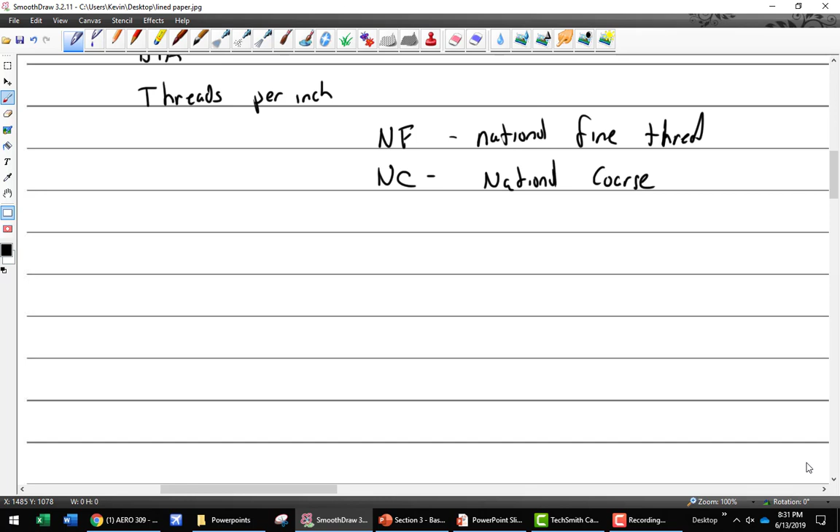All right, so let's talk about safety wire. Everybody's favorite project. Not for reals. It will frustrate you, and you will bleed and get mad at me, and I'm going to tell you, I didn't invent safety wire. All right, so safety wire. Safety wire or lock wire or however you want to call it.

So sizes. Safety wire comes in various different sizes and materials. So sizes. I don't like the way my notes... All right, we'll just do it this way. So stainless steel. That is the most common everyday go-to safety wire. There's other stuff. We'll talk about that. We're going to be talking about stainless steel safety wire.

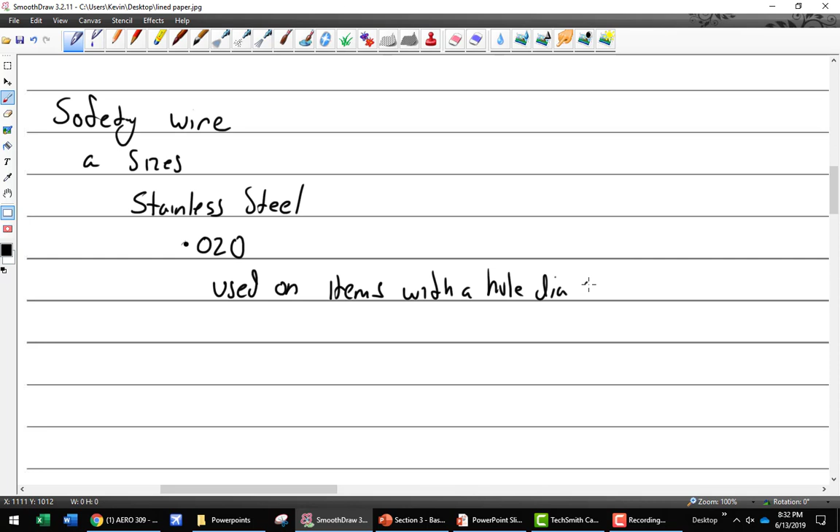There is .020 size safety wire, and oh boy, if you read 43.13, it kind of gives you this crazy definition. Used on items with a hole diameter, so that's like the hole in the head or a hole in the shank, of .045 to .062 with spacing less than 2 inches apart. So that's pretty close, right? I'm just going to give you kind of a rule of thumb.

And that is small screws. What does it say before .045? Of hole diameter of. Rule of thumb, small screws. So pretty much .020 is just really small screws. You don't use it a whole lot in aviation.

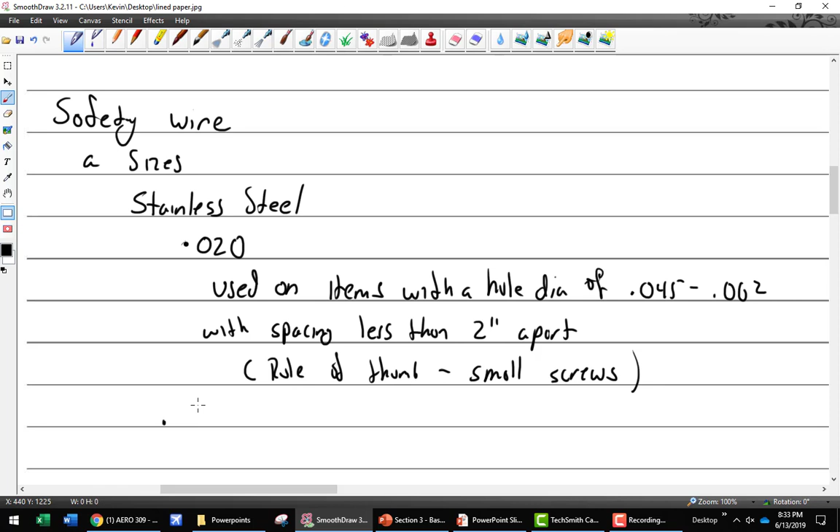Then you got your .032. And according to 43.13, it is used on items with a hole diameter, I'll abbreviate, hole diameter larger than .045. All right, so check this out.

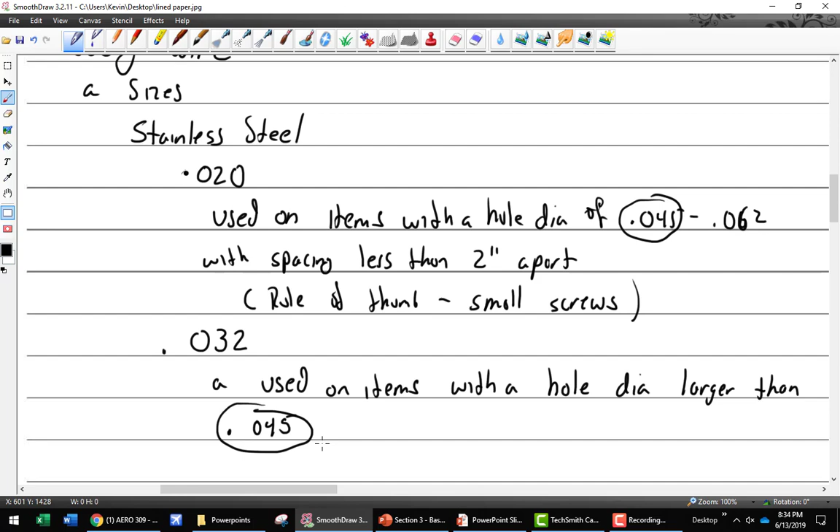This is used on stuff with a hole diameter of .045 to .062 with spacing less than 2 inches apart. This is used on items with a hole diameter larger than .045. That's the same number, and that's not a misprint. That's the same number as this number. So which one do you use? Most common. Rule of thumb, just go to .032. It's pretty much the stuff you use.

Now, could you get in trouble for using .032 where you were supposed to use .020? Never. You never get into trouble if you use a heavier safety wire. You get in trouble if you use a lighter safety wire. So if you use .032, you're fine. The only time I use .020 is if I've got little tiny screws that are very close together. You can't get .032 in and work it and do the twists, so then you go to .020. Otherwise, you're pretty much going to use .032 on just about everything. Okay.

Except, now we got .040 / .041. They seem kind of synonymous. I mean, you're talking about a 1/1000th of an inch difference. .041's a little stiffer to use. This is typically, unless otherwise mentioned, used on props.

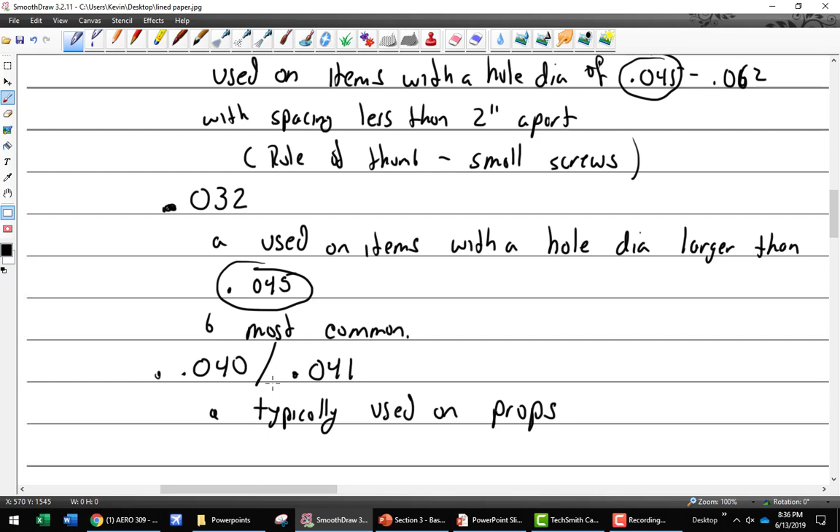One manufacturer tells you to use .040 and another manufacturer tells you to use .041. How can you solve that dilemma? Keep .041 in your toolbox and then never ever worry about it. Because you think the other manufacturer is going to get angry with you? They won't. Okay, so when you're just doing your general everyday safety wire, what's your go-to size? .032. If you're going to safety wire the bolts on a propeller, you better be using .041. You got little tiny screws? .020. All right, and what material?

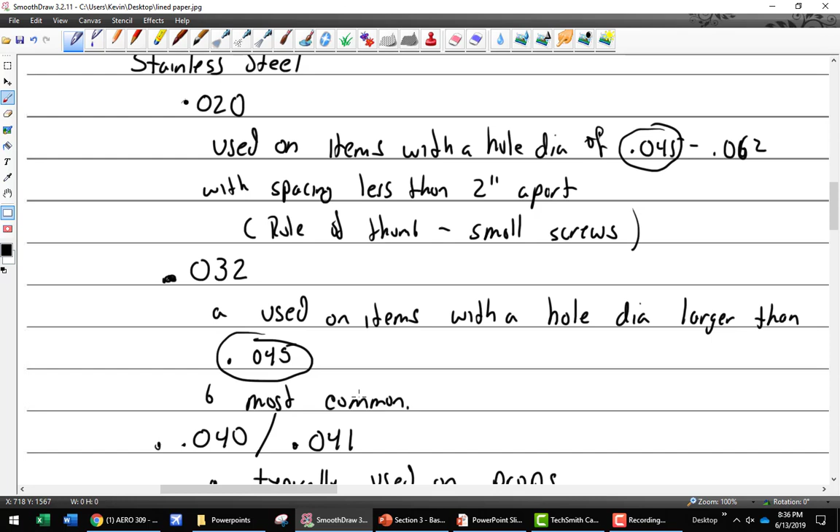All right. In addition to stainless steel, there is what? Is that a dot or an A? A. Okay. I was trying to be all with the outlining. But I'm picking and choosing what I want to do.

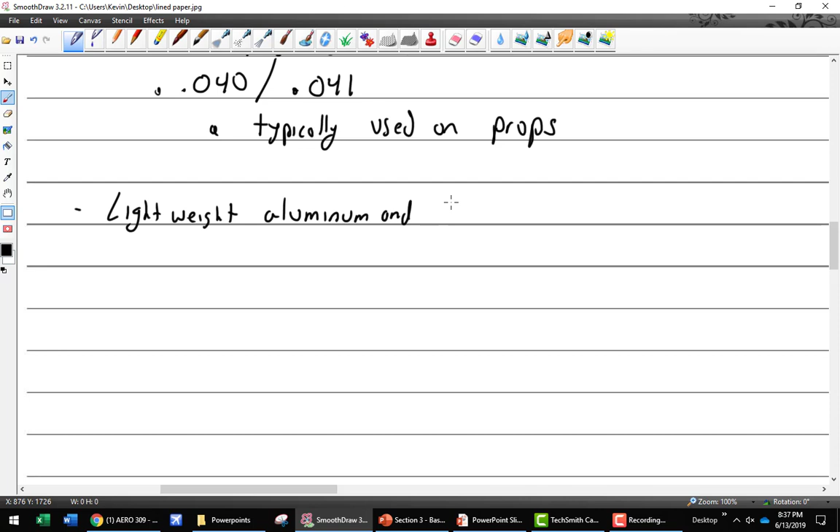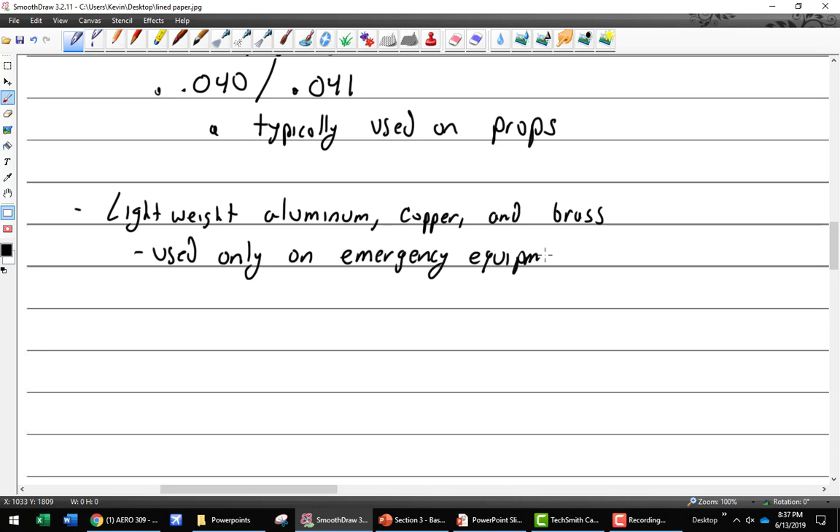All right, so lightweight aluminum, copper, and brass. Those are 3 different types that you can also get. It is used only on emergency equipment where the wire must be broken by hand. An example of emergency equipment?

Emergency equipment. Do you think that I should wire this pin onto this fire extinguisher with 040? Only if you want to throw it at the fire. Yes. Unless you want to beat the fire out this way. So, any type of emergency equipment. Switches that may be guarding something, like fire bottles.

On an aircraft, you actually have remote operated fire bottles. You have to lift up a switch and push a button or pull a handle. That handle or that button or lever may be safety wired with some very lightweight wire. It's really mostly there just to kind of say, are you really sure you want to touch this? And if the answer is yes, you want to be able to get access to it right away.

And then secondly, it lets us as the mechanic know, hey, maybe somebody's used this. If I came over to this and it didn't have this red strap on here, I could think that maybe this has been used. And then how would I check it? Look at the gauge. All right, so, emergency slide or something of that nature. You don't want to be looking for a pair of wire cutters during an emergency.

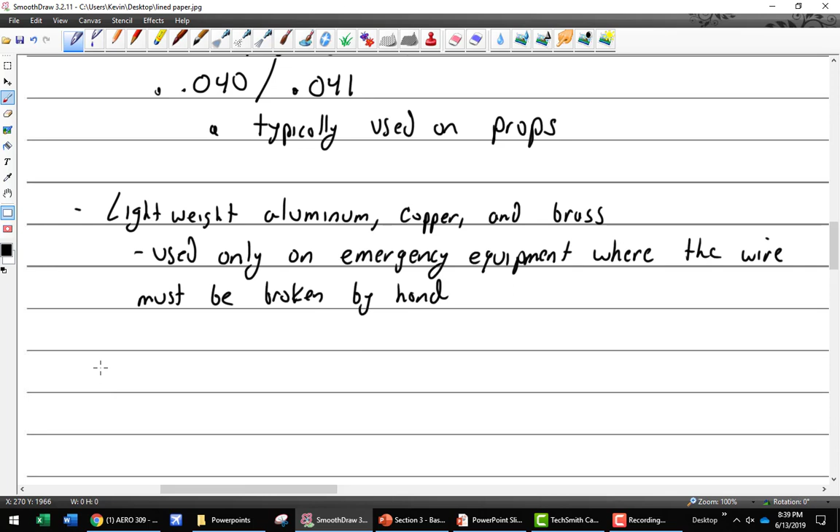All right, how to safety wire. How to safety wire is really something that needs to be shown more than it is talked about. I cannot show you because I don't have a way to mount something here and do it. So I will show you as many times as you want me to out in the lab. I've already given a couple of demos today, so I will do it. But there's a couple of rules that you should be aware of.

So safety wire is twisted. That's the end of the sentence. It is twisted at a rate of 6 to 8 twists per inch. If you go too much, it can break. Sometimes you use a single strand, but that's only if you're using lightweight screws and stuff. Loop the wire around the head, not over.

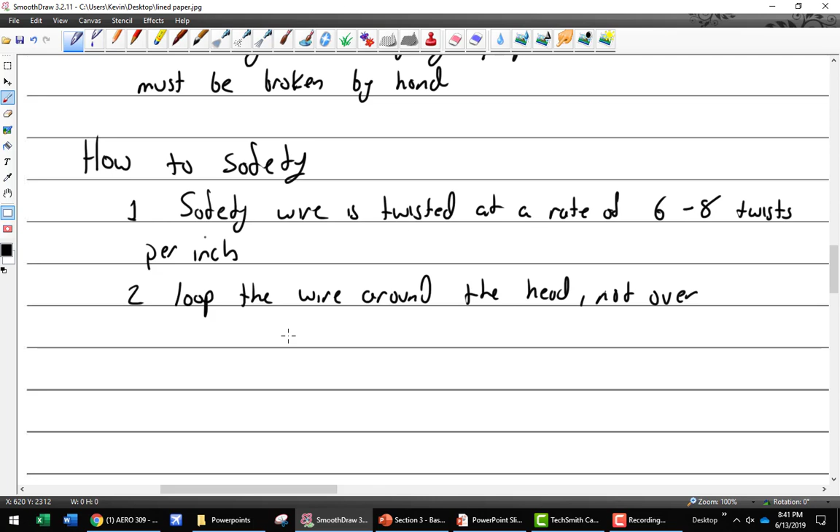The exception is castle nuts, castellated nuts. Castle, C-A-S-T-E-L. That does not look right. That's it. The exception is castle nuts. The wire goes over the top. What else can I say here? Oh. The wire, just like the cotter pin, should pull the bolt tight.

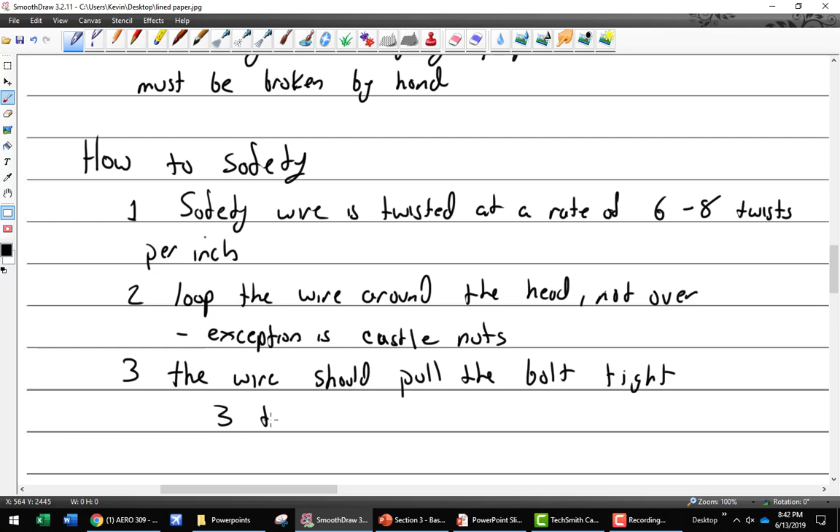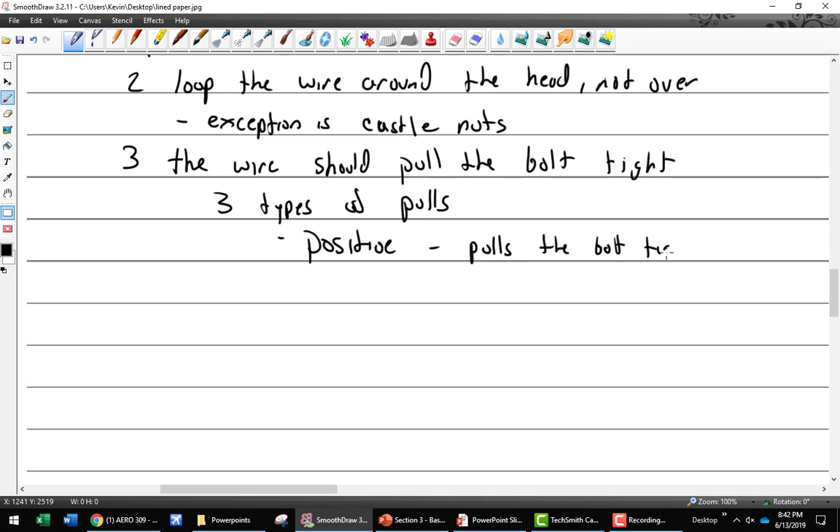So there's 3 types of pulls. Positive, which pulls the bolt tight. Neutral, we'll say no pull. And negative, pulls the bolt loose. That would be bad. So you want a positive. You can accept a neutral, but a negative may get you mocked.

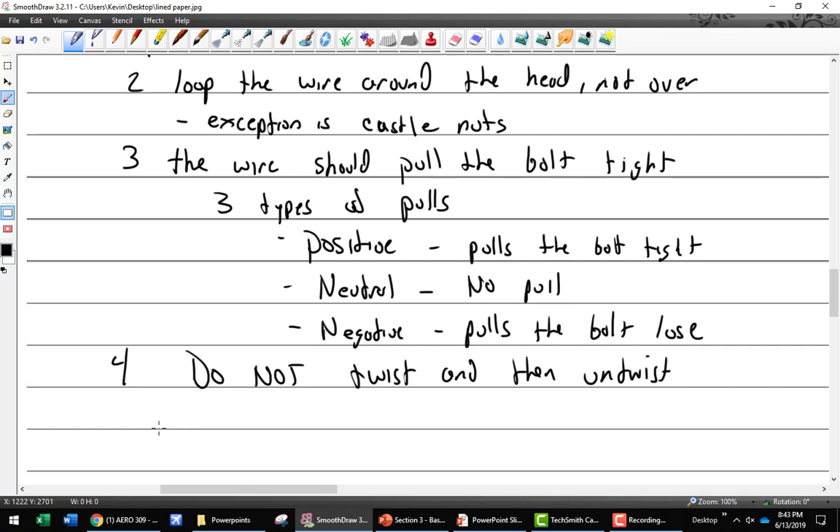That would never be an application, right? Never. Do not twist and then untwist. In other words, you twist it too far and you're like, oh, I got to untwist it. Don't do that. I can spot that a mile away, and you will too. So if you twist it too far, cut it off and try again. Do not adjust bolt torque to tighten wire. I know some people that do that. Do not reuse safety wire. Don't do that.

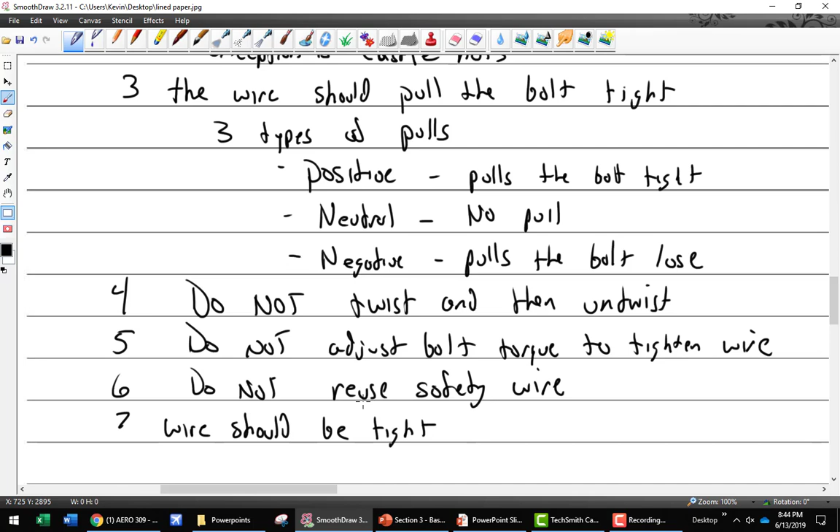All right, wire should be tight. So I can pluck it, make a little song on it. Should be nice and tight, not loose. Oh yeah. Cut the pigtail about 3/4 to 1 inch long. And hide the end so that I don't bleed.

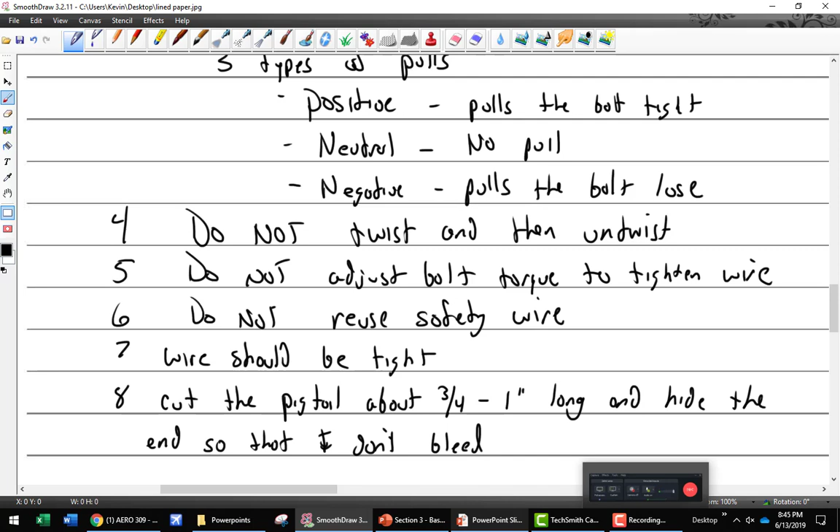Because if you leave that little pigtail sticking out, that stuff goes right to the bone. It hurts and you bleed. And I don't know what it is about a safety wire prick, but you bleed and you bleed and you bleed. Yeah. Are there cases in aviation where it's a left-hand thread? Yes. But you still have to pull it tight. So it's opposite. It'll look backwards, but it's still tight. So still pulling it tight.

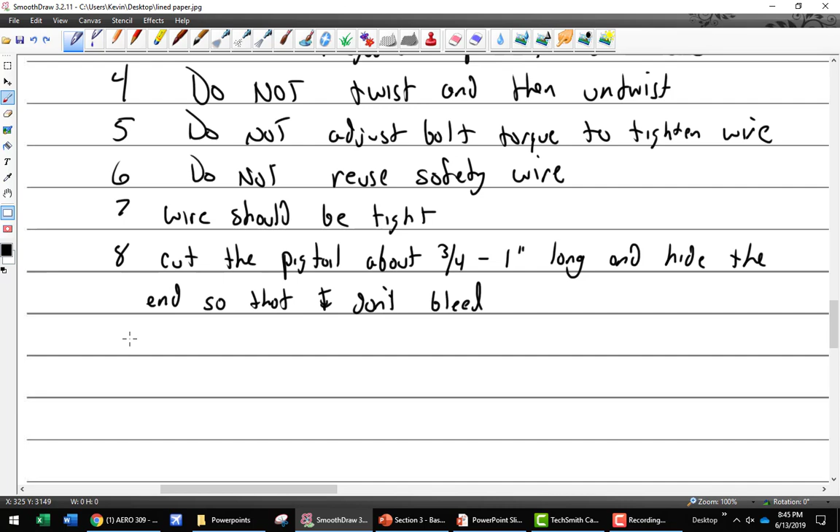What else do I have on here? We don't need to write those. I'll just type. All right. So those are the important things I want you to remember. Sometimes the best way to find and learn about safety wire is to laugh at other people. So let's laugh at other people. All right. This isn't funny. This is just the way it goes.

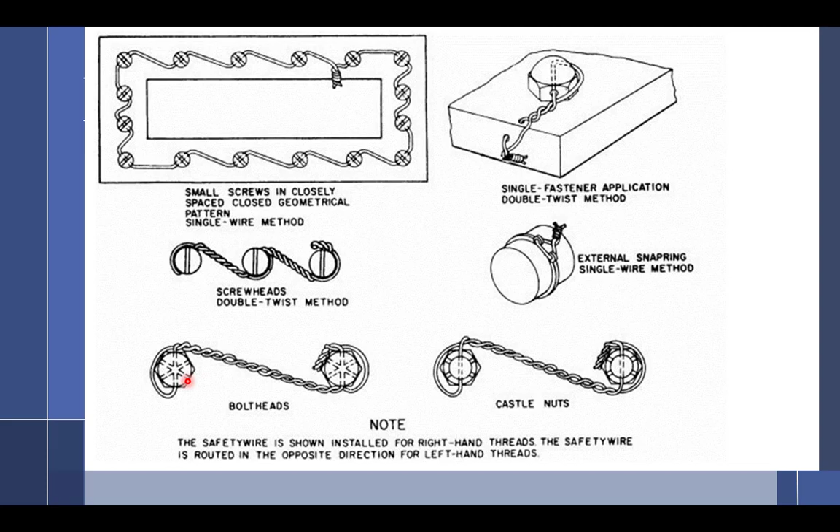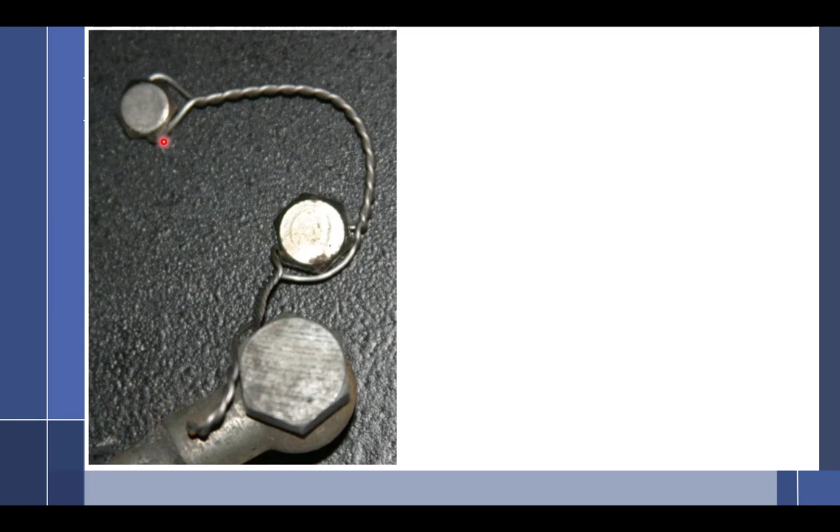Again with the thing in the middle. This is do not do that. At least this one's right, the twist started right at a hole. So does this look like it's tight? Negative. So I could lift this up and bring it over here like this. So this bolt here I could probably take all the way out without even messing up the safety wire. That's just bad. I found that on the internet, these last two. Negative too, this one here.

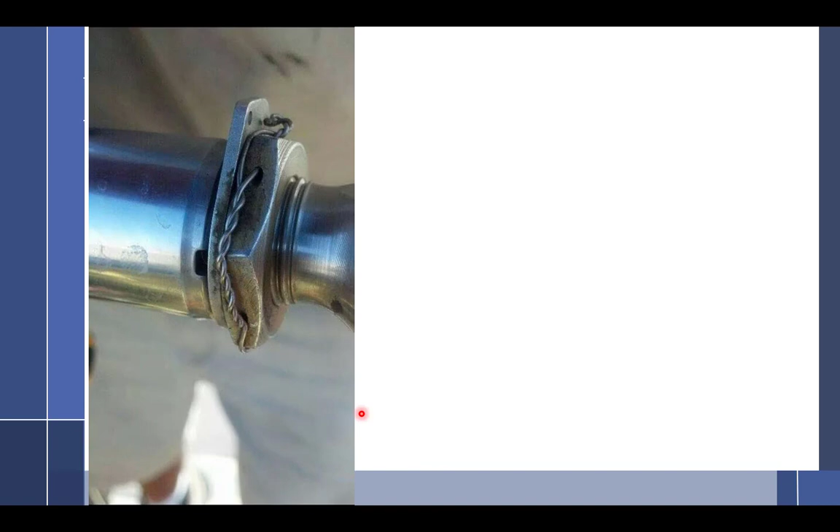All right, what's wrong with this one? Where's the safety going and locking? What is it? This is how you safety something when you have to take it apart often and you don't want to keep cutting the safety wire. Notice that it comes out of a bolt, the nut, and goes right into the same hole. So you can take it all the way off and not have to change safety wire. For those of you who don't get it, it should have been safetied to this hole right here. Make sure your safety wire has a purpose. Also, the pigtail's too short.

Oh, you want me to wait for that?

All right, so when you are doing safety wire, I'm going to teach you how to do it by hand. How many people know how to use safety wire pliers? There's a thing called safety wire pliers. I think that was the end. It was the end. With safety wire pliers, I don't even have a slide to show you, but the pliers lock on the safety wire, you pull the back of it, and the pliers spin, and it spins it real nice. We have those. For whatever reason, it's always been kind of an unwritten rule that first-year students can't use them. Until I had a student who graduated say, I got out in the field and they laughed at me because I didn't know how to use safety wire pliers. So I won't let you use safety wire pliers in 309, but once you prove proficient in safety by hand, then I'll let you start using safety wire pliers.

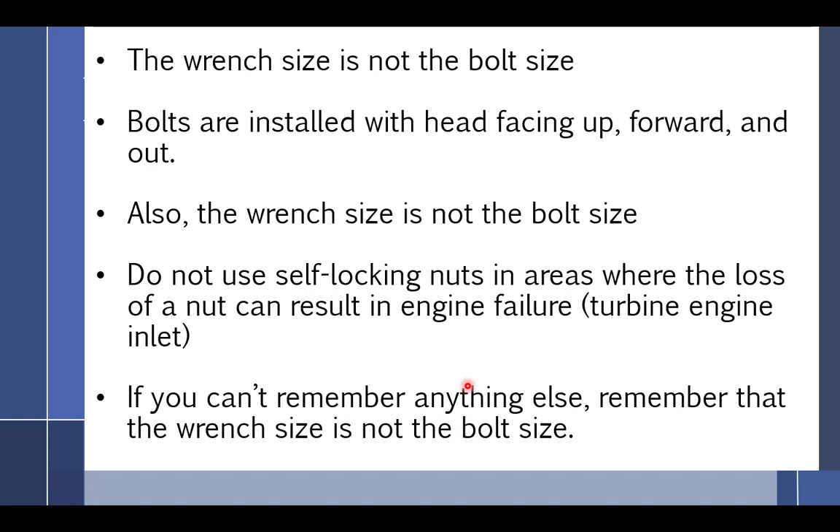All right, so we covered a lot this week, didn't we?